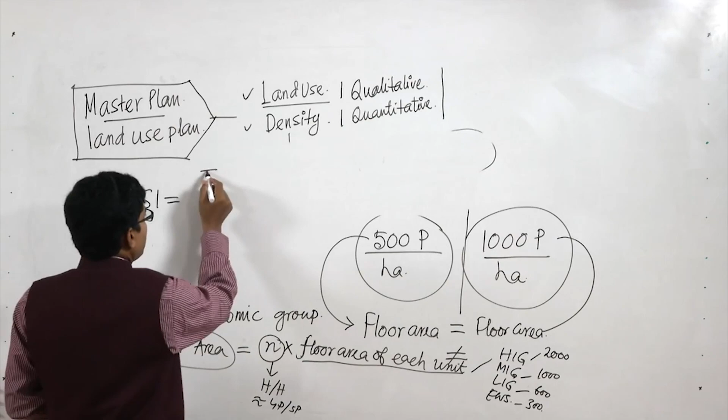Let us see. Most of you, those who are coming from the architecture background, you can understand or you have heard about the term FSI. So basically floor area is determined by the FSI, which is floor space index, that is the total floor area divided by total land area. So if the total land area we can consider as 100, and if the total floor area is 220, then the floor space index is 2.2.

So that is the index which we use, it can be any value, it's just for example we have taken 2.2, it can be 2, it can be 1.5, it can be any index. So that FSI will follow for a given residential district, but definitely we can vary the density just by varying the unit size as per the economic group.

That is the trick, that is the detailing of the planning or the strategy which needs to happen even after the master plan level, because at the master plan level the land use and density is prescribed, but density is just a figure only. So unless and until we go to the detailed level of the economic group and the type of housing, we cannot arrive at the exact density which can be achieved. So that is the very important part to understand, how the buildability and the density are related.

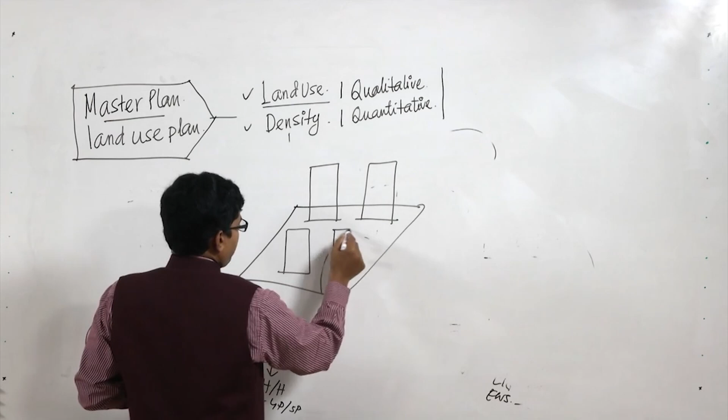The next part is the mixing of land and building use. Now in a particular given land, there could be various kinds of mixing in the site and also within the building. For example, if this is the site and there are 4 buildings, there could be a mixing, say out of 4 buildings, this is a different use. Like this could be residential, this could be commercial, this could be commercial. So within the campus, within the plot, we can mix two different kinds of use.

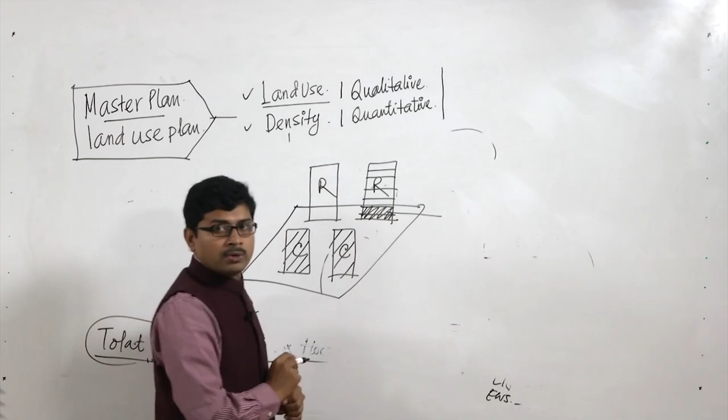Also, is it possible that within the same building, if this is a residential building, out of this one building, maybe 1 or 2 floors are used as commercial. So within the plot and within the building block, how far we can mix. So mixing means the extent of mixing and type of mixing. The extent of mixing is represented as a percentage. So this is basically mixed land use.

And type of mixing is basically given by the authority, by the planning document, as per the list of allowable mixes. So these kinds of stipulations need to be prepared or formulated after the land use plan is made. Other than this, we cannot go into the project level. So this is a very important part of the planning exercise, which is done after the land use plan.

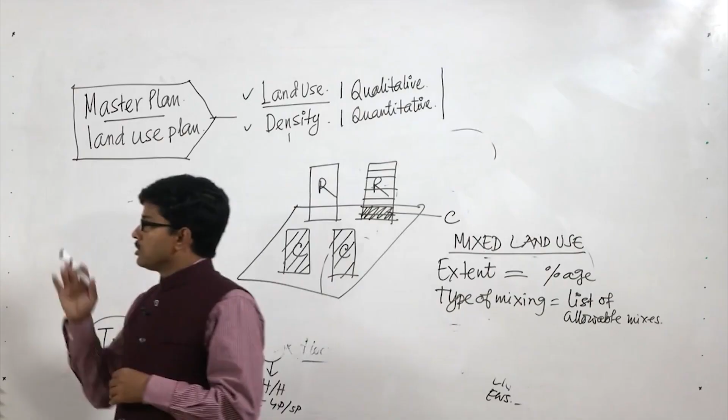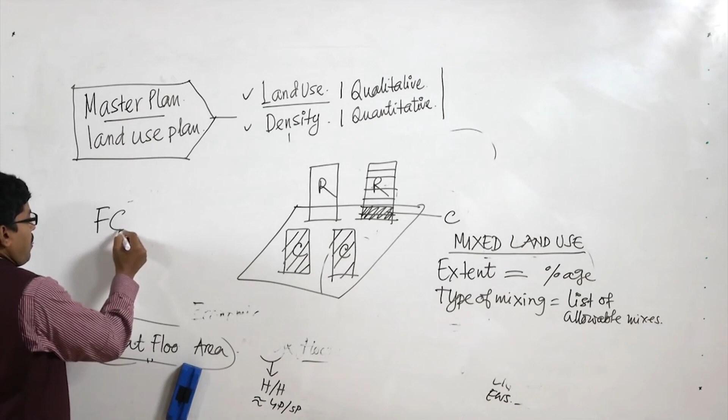The third part is the compactness, which is the relation between the volume and the ground coverage. Now we discussed the FSI. Think about a situation where the same FSI or same floor area is distributed over, for example, this plot and another plot. The same floor area can be distributed over comparatively low and medium storied buildings, or we can go for high rise and make two tall towers or fewer tall towers, or we can go for low and medium rise compact development.

So what kind of development we expect out of the project, whether it is HIG, MIG, economically weaker section or any other type of housing, based on its context we can take the decision. Now in this typology, even if the FSI is, for example, 2 and again 2, the development could be different. So this basically depends on the ground coverage.

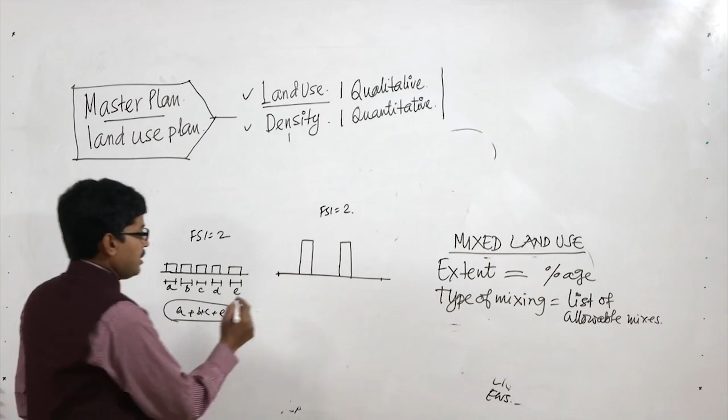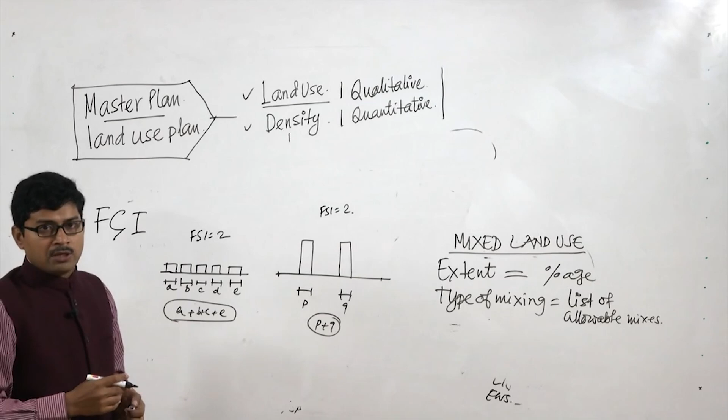So if we take this area, the ground coverage is the footprint area of the building, the amount of area occupied by the building, and here the footprint we can take like P and Q. You can see that the footprint is much more here, because the same area is distributed over the whole plot with low and medium storied buildings. Therefore it is the ground coverage which controls the compactness or the type of the building.

Then the visual impact. In a bigger project, if this is the total site, what is the visual impact? This could be one set of continuous multi-storied and tall buildings, or a combination of low rise, mid rise or high rise buildings. So what could be our desired kind of elevation? Using the FSI, the ground coverage and the height stipulation, we can achieve the desired visual impact of any housing or land use development. So this is a very important parameter.

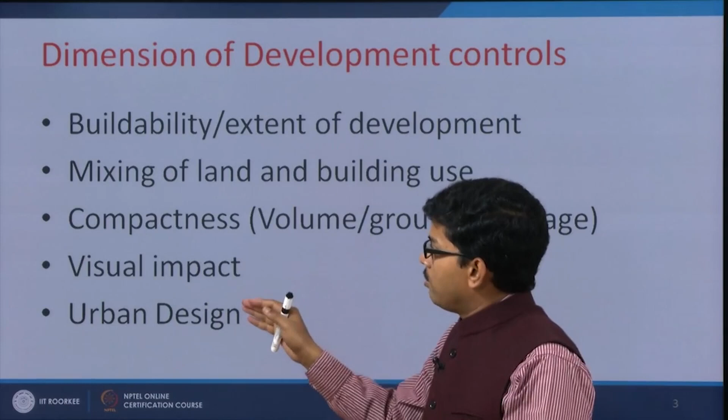These few parameters are very important to define the buildability of any plot. We build these buildability parameters based on the prescription of the land use plan, where we just prescribe land use and density. Another very important factor is urban design, which also includes these parameters, and in addition, the subject of urban design deals with other elements.

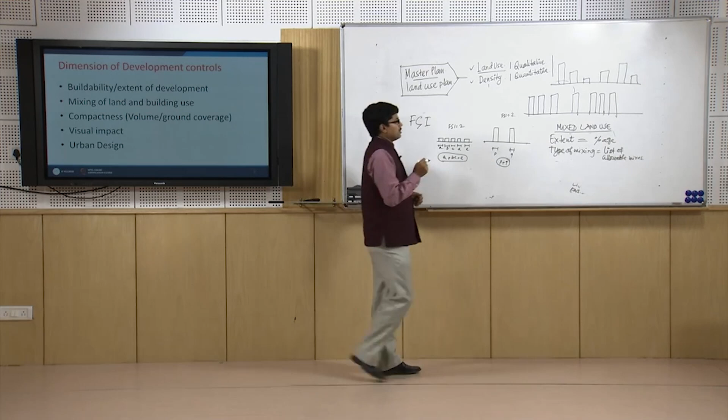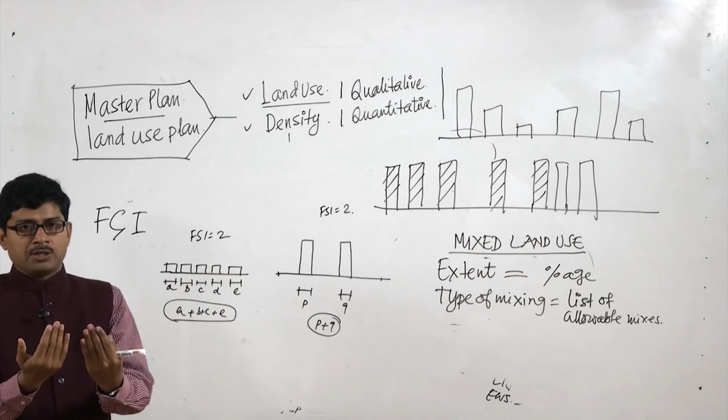If these are different buildings in different plots, how can a common visual relation be established between them? For example, we can design a commercial complex in one plot and another commercial complex in a different plot, but when you see the two buildings side by side, how can we establish a visual relation so that together both look nice and harmonious? That is the relation between the form, the scale, the color and the texture of the buildings. Those elements could be designed and understood in a better way.

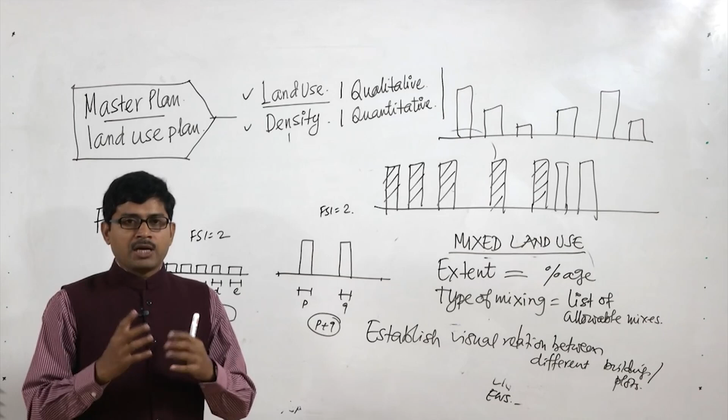So in urban design, basically we establish visual relation between different buildings and also different plots. Now as an architect or an engineer, if you deal with a single plot, you develop many buildings. There is definitely some design criteria, design philosophy to unite all the buildings or the visual quality.

But if it is distributed over a large number of plots, how do you do it, because the owners are very numerous and diverse? So how do you establish a relation? Those kinds of relations can be established if we make stipulations like the color code, the texture, the elevational treatment, and of course parameters like visual impact, compactness, and the others.

So combining all these dimensions, we can make a controlling system, a prescription system which defines the built element of our environment. In any environment we have the natural environment, but we are trying to define the built element, which is by and large predominantly dominated by the residential or the housing development. So these are the dimensions.

Now let us see the next part of the discussion: what are the parameters. We discussed the floor space index. Now we should talk a little more about the floor space index. Basically it is an index which defines the maximum buildable area of a given plot. So for residential, commercial, industrial, cultural, the floor space index could be different. Now how does it differ, how does it affect, or how is it influenced by other parameters, who is the determinant of the floor space index?

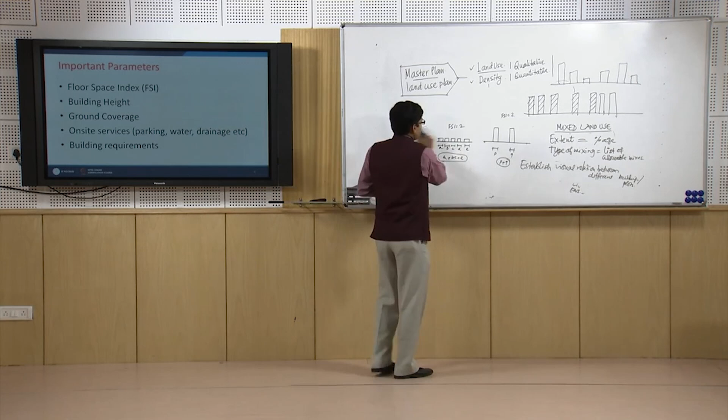Now let me explain this, because for any housing development, for any housing design and planning, this is very important to understand. Please recall our earlier discussion of the dimensions of housing, that housing is not only a house; housing is essentially a house and a few other dimensions like infrastructure and facilities, safety and security, social belongingness, and individual attachment and perception. So from that housing concept, the dimensions of housing,

one very important dimension was that a house does not become a house without the essential infrastructure like water supply, sanitation, waste management, green open space, electricity. It does not become a livable house or livable area. So that is the difference between developed land, where the infrastructure is available to make a house, and raw land or agricultural land, where urban or housing infrastructure is not there. So this infrastructure basically qualifies any plot to be eligible to build a house.

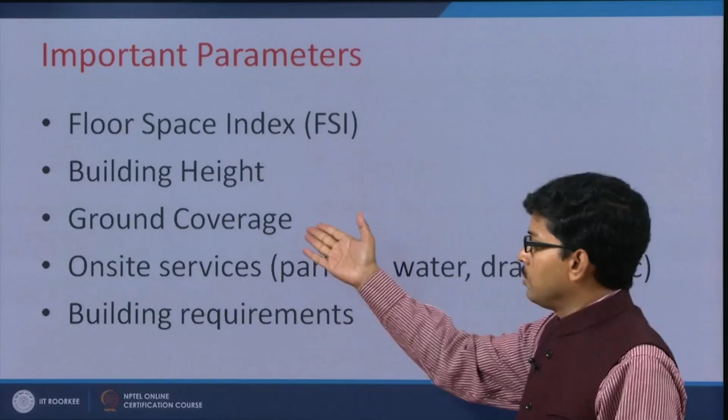The taller the building, the more ground space is available for green, and the ground coverage is less. So ground coverage and building height are inversely related. More the building height, less the ground coverage, and more the ground area available for your community facilities. Apart from that, there are parameters like on-site services, parking, water requirement, drainage, etc.

So the infrastructure we talked about here has two elements: one is on-site and one is off-site. For example, in a city or any township, the off-site infrastructures are the centralized large infrastructure which is shared by all the population of the city or the township. But the on-site infrastructure is the specific infrastructure built within a site, which is used by the population enjoying that particular plot.

So on-site and off-site are both important to define a project or define parameters like FSI, building height and ground coverage. So these on-site services or infrastructure are also a very important parameter to define the development or buildability of the project.

Then the building requirement. Whatever we have discussed, on site or off site, the main objective of discussing all these parameters is to define a building envelope so that the building looks good, becomes very functional, and is durable for the people. But what is happening inside the building? Do we design the building based on some norms and codes so that the inside space of a housing project becomes more livable?

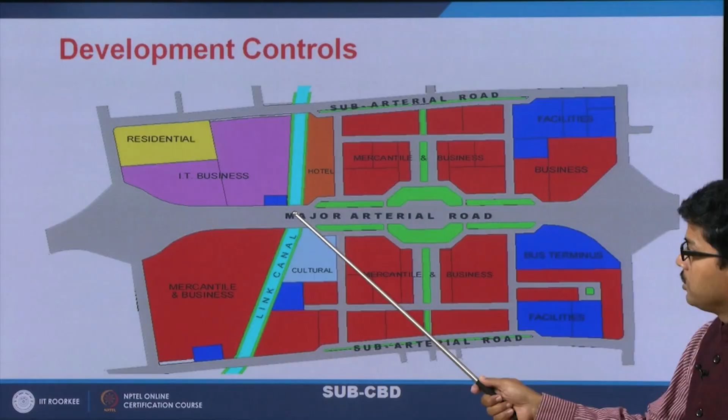This is the business district of a new township, the case study I showed last lecture, New Town Kolkata. Now you can see, in the whole business district, how the road is made different. The front part of the commercial area is made different to bring some aesthetic element, some urban design element, a common elevational treatment to the front facade of the whole area. So this kind of thing we do here.

Also you can see how the road is widened based on the requirement here and in other areas to accommodate parking and other facilities, so that we can have other off-site infrastructure and facilities which are not there inside the plot. So inside the plot and outside the plot both are required. This kind of exercise is required after the master planning exercise, so that we can define the buildability and the envelope of the building.

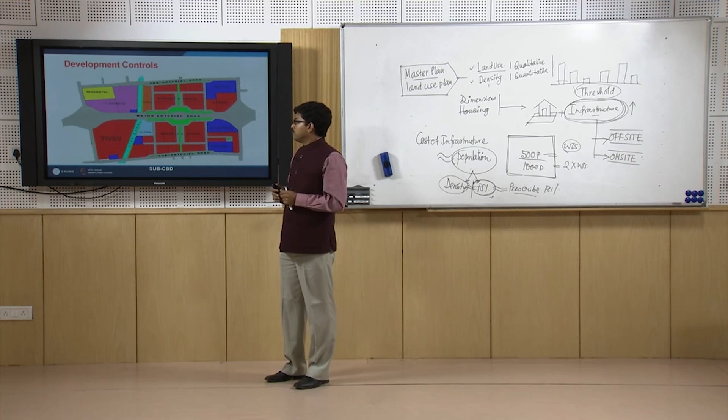So having said that, the next discussion will be on the very important part touched on here: to define the FSI and the density, one very important criterion is the infrastructure. So the infrastructure and facilities required for housing development will be dealt with in 2-3 lectures. In the next lecture we will discuss housing infrastructure and services.